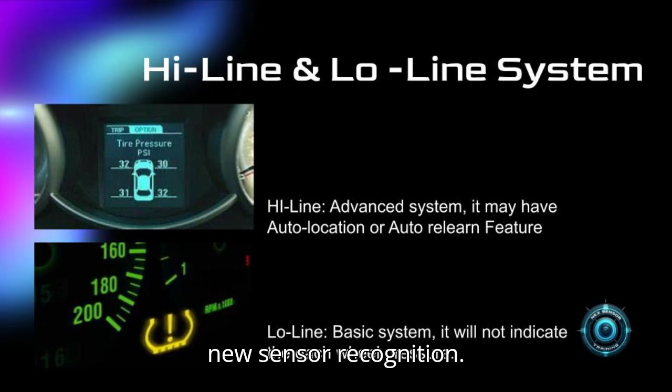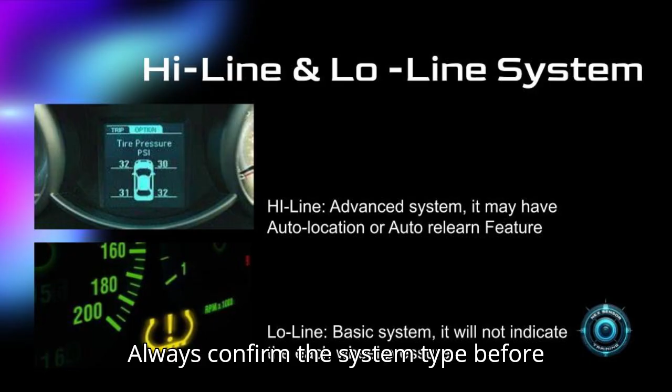This is not the same as auto relearn, which refers to learning new sensor IDs after a replacement. Auto location only corrects existing ID positions, not new sensor recognition. While highline systems offer more features, they tend to consume more battery due to ongoing communication. On the other hand, low-line systems display only a general TPMS warning light, no pressure, no position info. Always confirm the system type before starting diagnostics or programming.

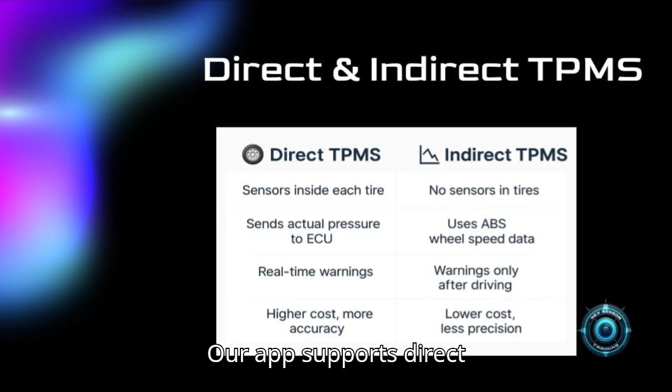TPMS systems are either direct or indirect. Direct TPMS uses sensors for real time pressure readings, highly accurate and responsive. Indirect TPMS estimates pressure using the ABS system. It's less accurate and slower to detect leaks or pressure loss. Our app supports direct TPMS only to ensure reliable programming and diagnostics.

TPMS sensors operate using two key frequencies. A 125 kHz low frequency LF signal is used to wake up the sensor. The sensor then responds with a 315 or 433 MHz high frequency signal depending on the vehicle. Some vehicles have built-in LF initiators for auto relearn or auto location, but most do not support triggering while stationary. That's why using a professional TPMS tool is highly recommended for reliable sensor activation and faster diagnostics.

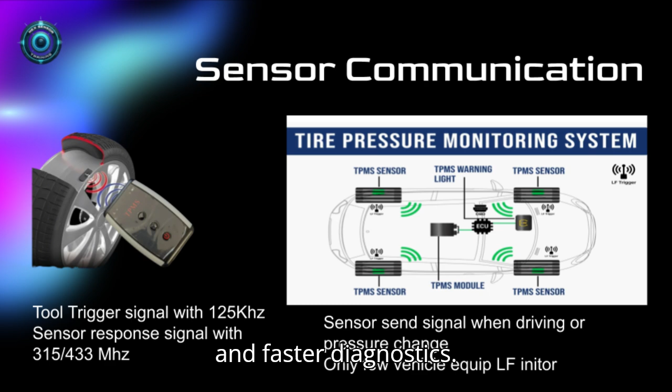Beyond frequency, TPMS sensors must use the correct signal protocol to communicate with a vehicle's ECU. Different makes, models, and production years often require unique communication formats, even if the frequency is the same. That means a 315 MHz sensor won't work if the protocol doesn't match. When programming or selecting a sensor, always refer to the exact vehicle specification to ensure protocol compatibility.

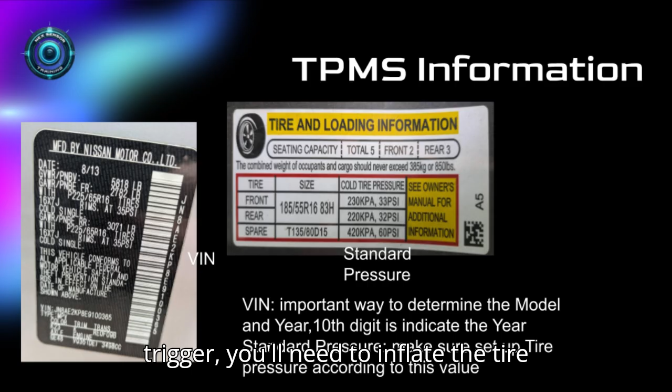Two key pieces of information are critical when setting up TPMS sensors. First is the vehicle identification number, VIN, especially the 10th digit, which identifies the model year and helps avoid protocol or frequency mismatches. Second is the OEM standard tire pressure, which defines the baseline for low pressure warnings. In most cases, the warning threshold is set 6 to 8 psi below the standard. If the TPMS light is on but all TPMS is able to trigger, you'll need to inflate the tire back to at least the standard pressure to clear the warning.

Next, we walk through the standard TPMS service workflow. This includes verifying vehicle specs, checking sensor status, programming or cloning sensors, installing them, and completing the relearn process. Each step builds on the last, so understanding the full flow is key to successful TPMS work. Let's break it down step by step.

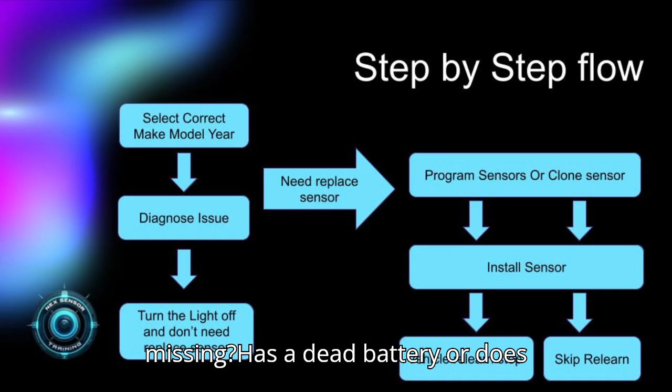Let's go through the next TPMS workflow. Step 1: select the correct make, model, and year. This ensures compatibility. Step 2: diagnose the issue. Is the sensor missing? Has a dead battery? Or does the tire just need inflation? Sometimes it's not the sensor, just low pressure.

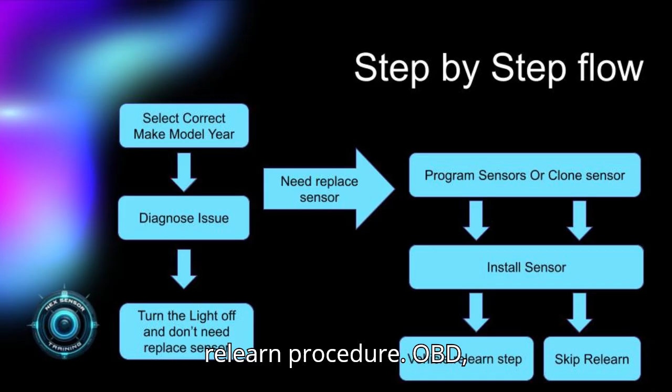Step 3: program a new sensor or clone the existing one. If you choose to clone the original sensor ID, you can skip step 5 - no relearn needed. Step 4: install the sensor into the tire. Step 5: if you programmed a new ID, perform the relearn procedure - OBD, manual, or auto depending on the vehicle.

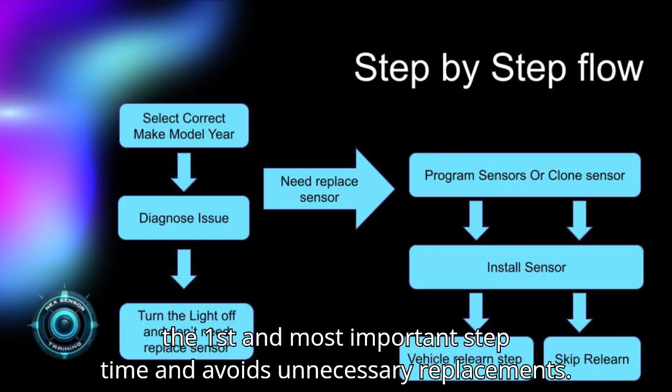Setting up this process ensures accuracy, saves time, and avoids unnecessary TPMS sensor replacements. The first and most important step is picking the right car model and year.

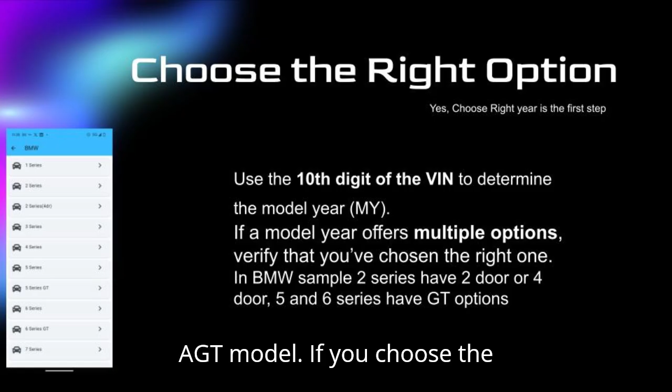One easy way is to look at the 10th digit of the VIN. It tells you the model year. But here's the catch - that same year might have different versions. For example, BMW's 2 Series could be a 2-door or 4-door, and the 5 or 6 Series might include a GT model. If you choose the wrong one, the sensor won't pair right and everything falls apart. So double check the details and make sure you've got the exact match before moving forward.

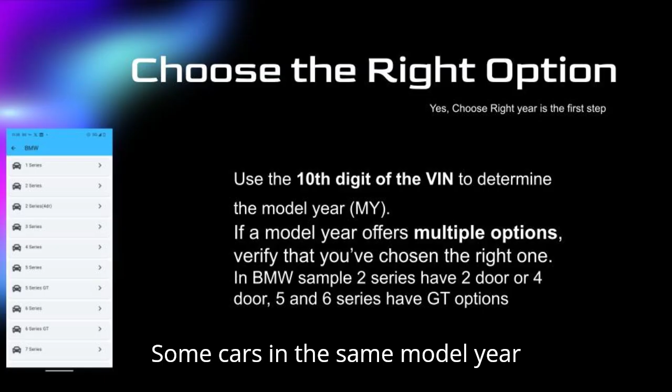Some cars in the same model year might use different TPMS sensor frequencies, like 315 or 433 MHz. That means checking just the year isn't enough. You need to confirm which frequency the vehicle actually supports.

One of the best ways to do that is by looking at the OE sensor itself. Most OE sensors will show the frequency printed right on them. For example, part number 42607-0C080 clearly shows 315 MHz.

If the old sensor still has battery, you can trigger it and check the response. You can also use a key fob frequency detector to help identify the correct type. And if the car supports manual relearn, try pairing both options to see which works. Bottom line: pick the wrong frequency and the whole TPMS system fails.

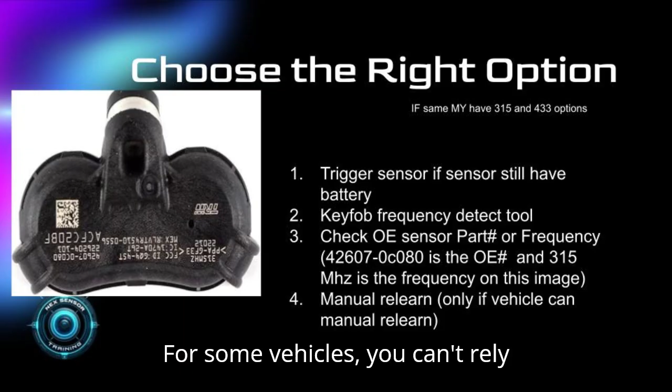For some vehicles, you can't rely on just the model year to select the right TPMS sensor. You might need to look at the production date, trim level, or even which manufacturer made the sensor. It's common to find same year, same model cars that use completely different frequencies and protocols. So don't just go by the year, get the full details. Choose the correct TPMS option so the vehicle can actually receive the signal.

Place the sensor in position, then hold the programming pad directly above it, aligned with the lead zone. Keep any unrelated sensors at least 2 meters away to prevent accidental programming or signal interference. If you are creating a new ID, go with the auto-generate option. And if one of the OE sensors is dead, the others probably aren't far behind - swapping all four at once is highly recommended.

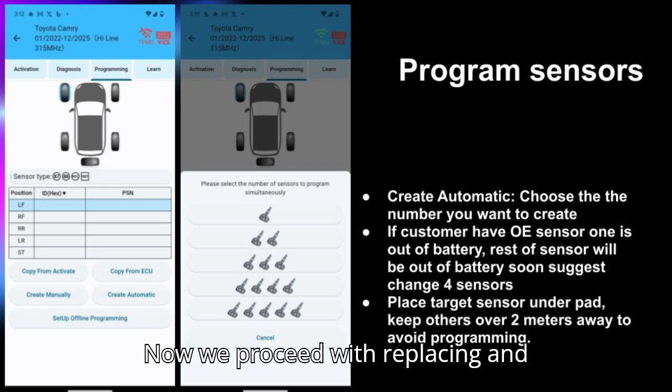Now we proceed with replacing and installing the TPMS sensor. After the sensor has been successfully programmed, begin by removing the old TPMS unit from the valve stem. Install the new sensor carefully onto the valve stem. If using a rubber valve, apply a small amount of lubricant to assist the installation and prevent damage. Once secured, remove any excess lubricant to avoid future rotation or slippage of the valve. Finally, adjust the tire pressure of each wheel based on the manufacturer's recommended pressure values, ensuring accurate readings and safe operation.

Let's move on to the TPMS relearn procedure. Each TPMS sensor carries a unique ID and communication protocol. When sensors are replaced, the vehicle must relearn their IDs using one of several supported modes. Depending on the make and year, your vehicle may offer multiple relearn options.

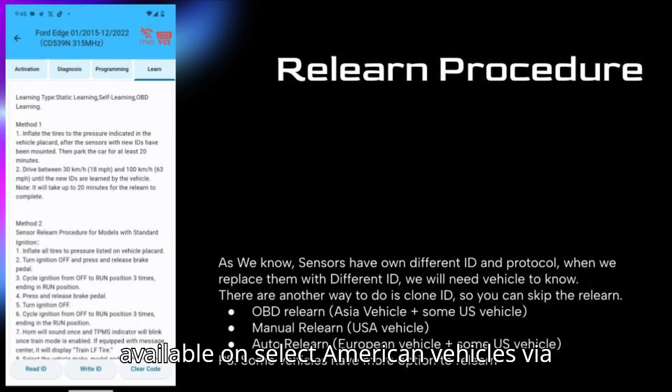OBD relearn, used in most Asian vehicles and some US models, uploading IDs through an OBD interface. Manual relearn, available on select American vehicles via factory-defined steps. Auto relearn, common on European vehicles and some US models, where the ECU detects sensors during driving.

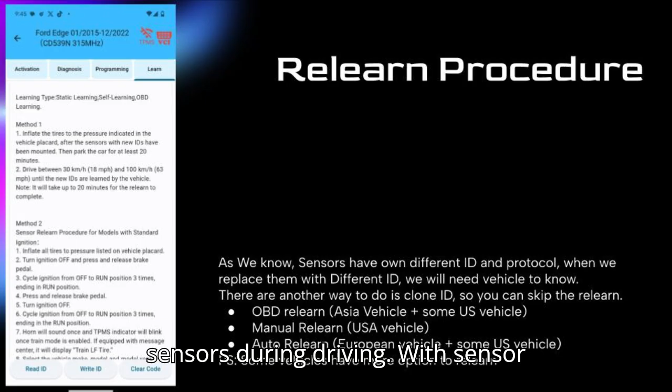With sensor ID cloning, relearn can sometimes be skipped entirely. Reminder: some vehicles support more than one relearn method. Always verify and select the correct approach based on your car's specifications.

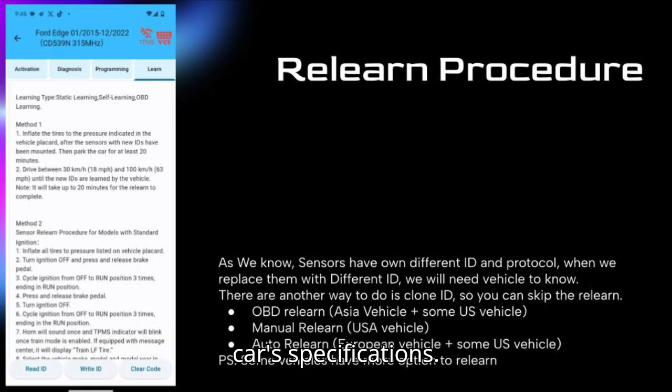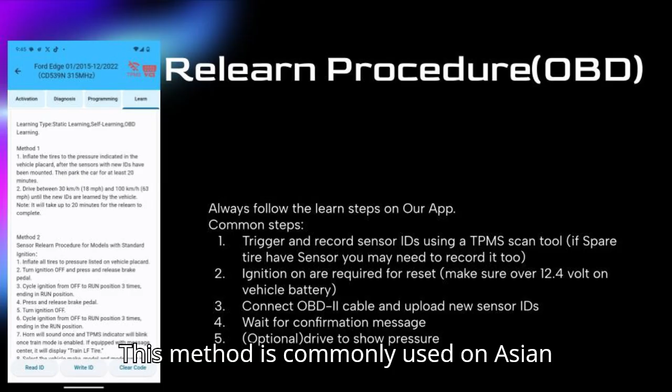In this section, we'll explain the TPMS OBD relearn procedure. This method is commonly used on Asian vehicles and some US models. It works by uploading new sensor IDs directly into the car's ECU through the OBD port.

So what does the process look like? First, you'll use a TPMS tool to activate each sensor and capture its ID. Next, switch the ignition to the on position and make sure your battery has enough charge, ideally above 12.4 volts. Then, connect the OBD2 cable and send those IDs into the system.

Once the upload is complete, wait for the confirmation message. That means your relearn is successful. And in some cars, you might take a short drive afterward to verify the pressure readings are showing up properly.

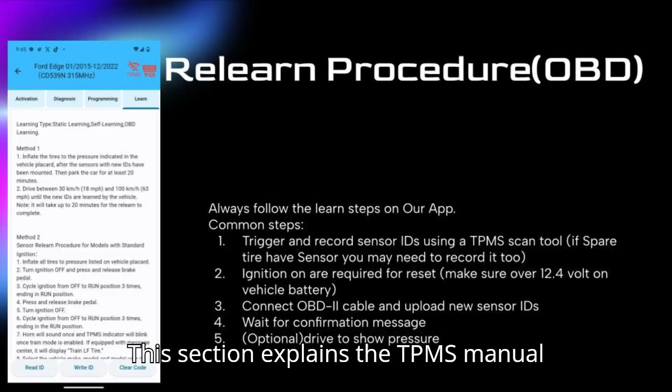This section explains the TPMS manual relearn process. It's mainly used for American-made vehicles. The general flow looks like this.

First, follow the manufacturer's steps to enter relearn mode, so the vehicle is ready to receive the new sensor IDs. Then, use a TPMS tool to activate each sensor one by one. The typical sequence is left front, right front, right rear, then left rear.

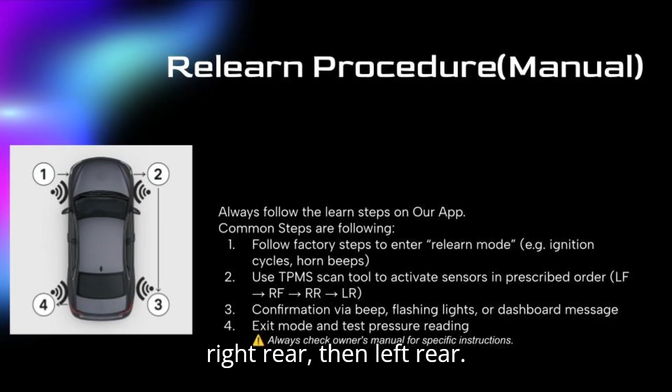Once finished, the vehicle will confirm success with a beep, flashing lights, or a dashboard message. After that, you exit the relearn mode and the system starts reading tire pressure data correctly. Don't forget, the way you enter relearn mode can vary by vehicle, so always refer to the owner's manual for exact steps.

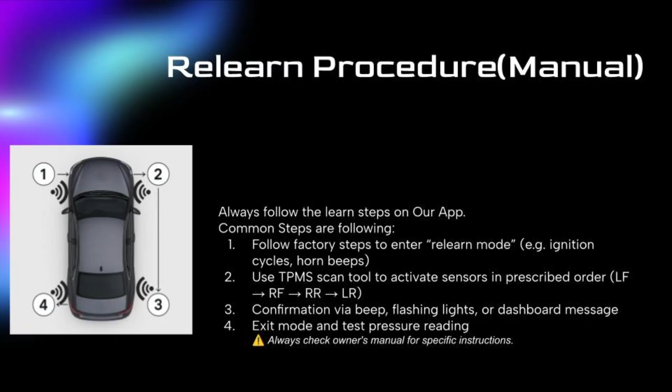In this section, we'll go over the auto relearn process for TPMS. Before driving, most vehicles recommend staying parked for around 20 minutes. This allows the ECU to reset and prepare for detecting new sensor IDs. This method is common on European vehicles and some American models and doesn't require a scan tool.

First, install the new sensors onto the wheels. Then, drive the vehicle at speeds above 30 miles per hour for roughly 10 to 30 minutes. During that time, the ECU will automatically detect and register the new sensor IDs. Once everything's paired, the TPMS warning light will turn off and tire pressure readings will appear correctly.

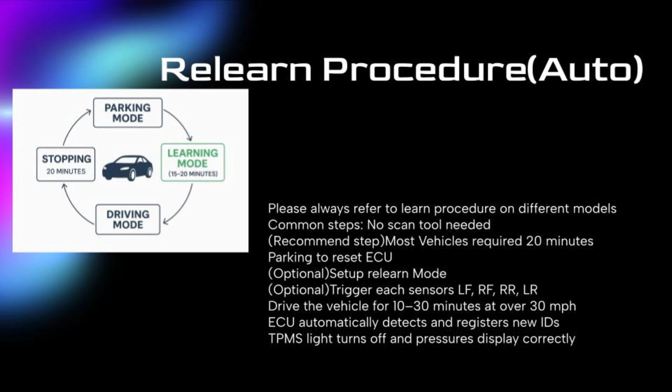This slide explains the trigger order for TPMS sensors. Most vehicles use a standard sequence when activating or relearning sensors: left front, right front, right rear, left rear. Following this order helps the system identify each wheel's location correctly.

But if the vehicle has dual rear wheels, like on some trucks, the sequence might be different. Always follow the instructions provided in the app or check the owner's manual to avoid mispairing or incorrect readings.

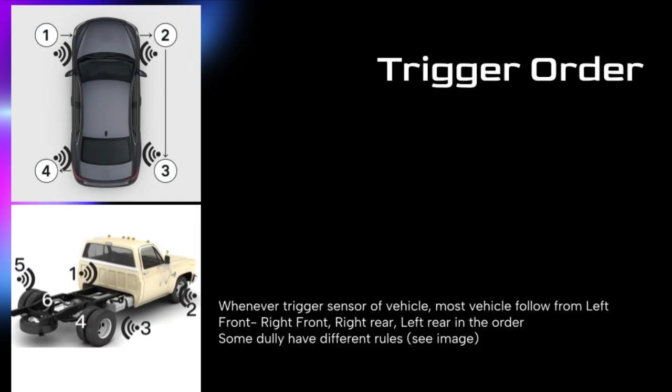Let's go over TPMS sensor ID cloning. When the new sensor properly duplicates the original ID and is installed in the same position, most vehicles won't need a relearn or reset. Just make sure the format is correct, either hex or decimal.

Hex IDs use numbers 0 to 9 and letters A to F, while decimal uses only numbers. Using the wrong format might cause the vehicle to reject the sensor.

There are a few cloning methods. If the original sensor still has battery power, you can clone using the activate mode. If your app supports OBD, you can extract the ID from the ECU.

If the original sensor is dead, but you're using an OE, original equipment sensor, you can manually enter the ID to clone it. Keep in mind, manual clone only works with OE sensors. Aftermarket ones aren't supported for this method. Using the right approach saves time and prevents setup errors.

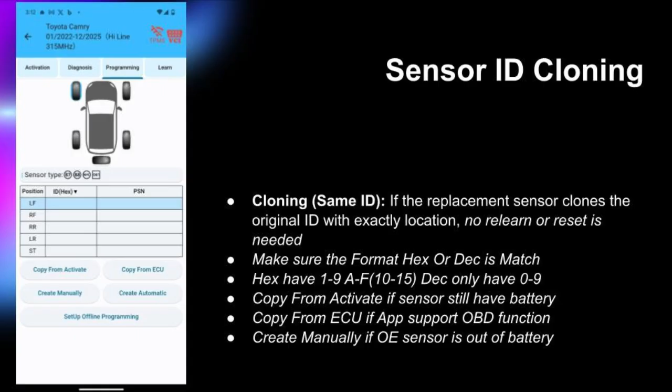That wraps up our basic TPMS training. From sensor selection and ID programming to installation and relearn procedures, each step matters. Following the right workflow helps reduce mistakes, improves efficiency, and makes TPMS service smoother for everyone.